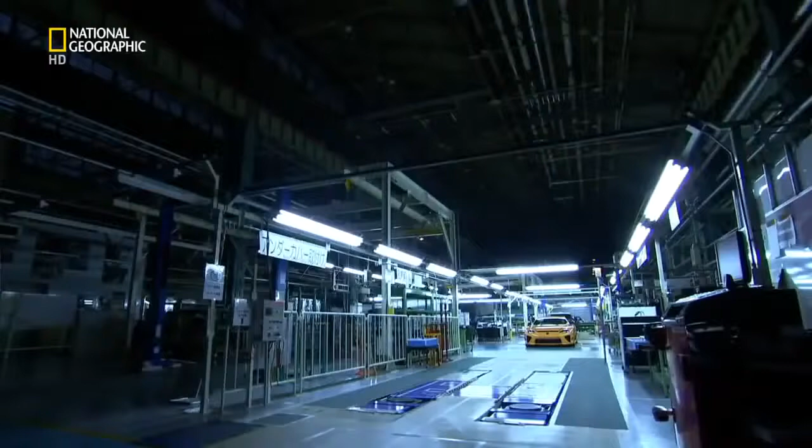Inside this top-secret mega factory, a car like no other is taking shape. Craftsmen hand-build what they consider an automotive work of art. Money is no object. This machine must redefine a billion-dollar brand. Failure, not an option.

Japanese marque Lexus sells itself on luxury, marketing its cars as elegant, quiet, high-tech, and efficient. Now, a different kind of car wears the Lexus badge, the LFA. Aggressive, loud, agile. Highest revving V10 engine in a production car. 325 kilometers per hour. A car like nothing Lexus has ever produced before.

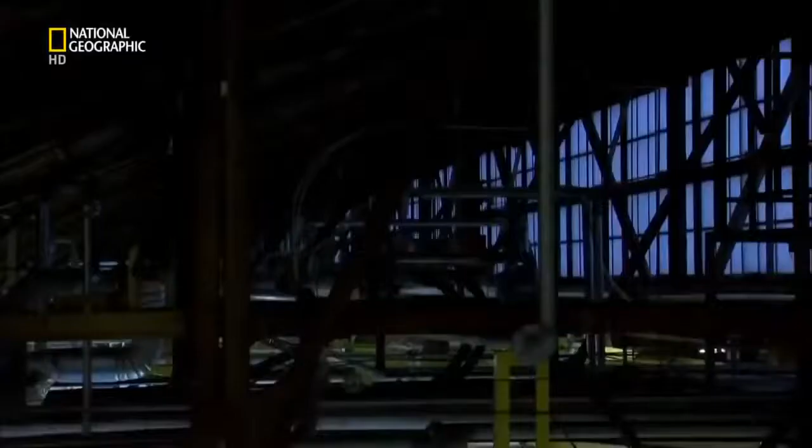I wanted to make a new sports car, one that could stand against the long-established European so-called supercars, Porsche, Ferrari, and Lamborghini, to show that we Japanese could make something like that. It's a risk. The company hasn't made anything like this before. Their reputation depends on its success.

Chief Engineer Tanahashi is stepping into the unknown. He must build a car, a team, and a factory from scratch. Basically, we proceeded at my discretion. And where there weren't any rails, I laid them down.

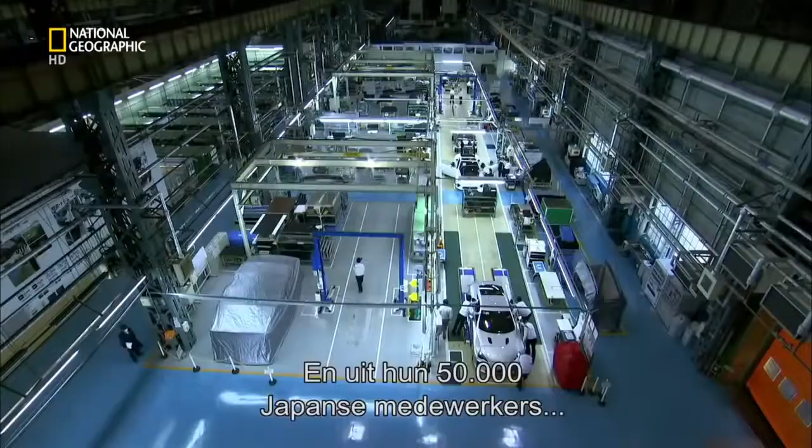Finding a factory in Japan isn't hard when you're part of the country's largest company. Toyota is so big, they even have their own city, Toyota City. Of the company's 15 Japanese factories, 10 are found in the city or close by. Among them, the Motomachi assembly plant. The company transformed two unassuming blocks of this megafactory to create the LFA. They then scoured Toyota's 50,000 Japanese workforce to handpick just 175.

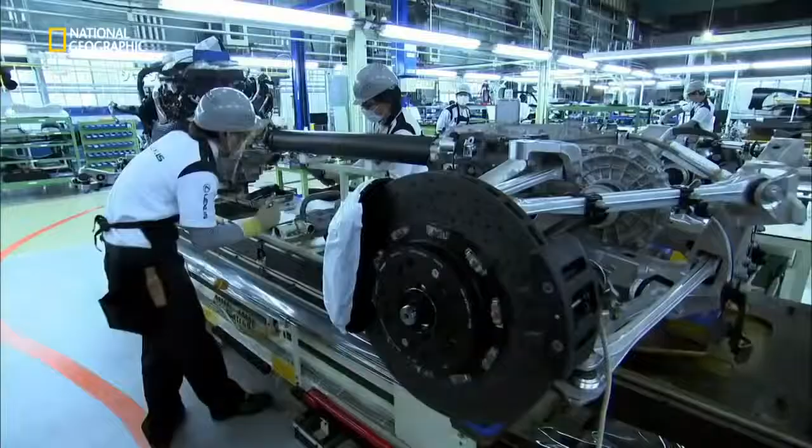All the associates here at the LFA Works feel they are artisans, not just operators. These artisans are known as Takumi, Japanese for craftsmen, a status only conferred on the most highly trained, skilled workers. Each and every associate at the LFA Works is seeking to achieve perfection, taking this challenge on with a sort of samurai spirit.

Yamanaka Shigeru is manager of the LFA Works. His teamwork credentials come from another time-honored Japanese tradition: baseball. Before this, I was working as manager of the Toyota Motor Corporation baseball team, which brought people together from lots of different... It was because I could manage that organization that I was made manager here.

To reach their goal, the tight-knit team utilize sophisticated tools and materials to build the car. The most important of these is carbon fiber composite. Carbon is crucial to the car's performance. It's a material 5 times the strength of steel, yet a quarter the weight. It's the construction material of choice for both Formula One racing cars and the aerospace industry. The company even make their own carbon fiber here on site. Up until now, no television cameras have ever been allowed inside this top-secret facility.

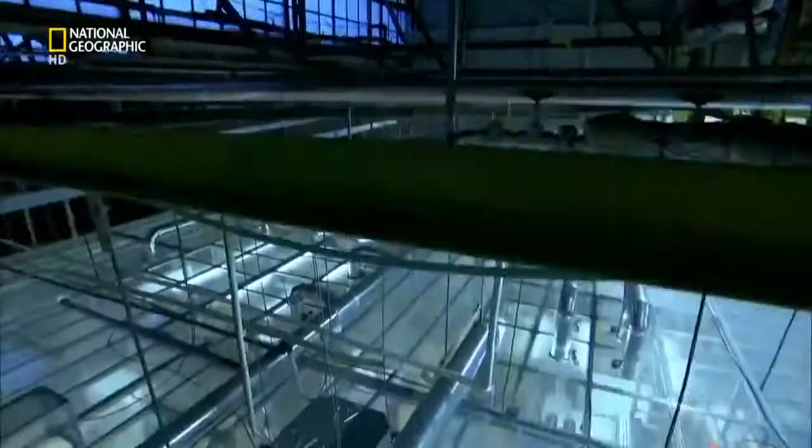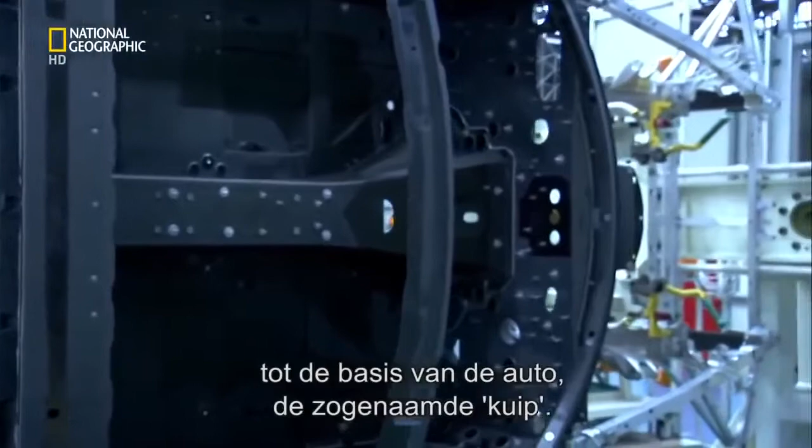First, simple strands of carbon fiber are woven into a pliable cloth using an automated weaving machine. This fabric is then transformed through heat, pressure, polycarbonate resin, and labor-intensive techniques into the car's core known as the tub. The tub is pieced together like a 3D jigsaw.

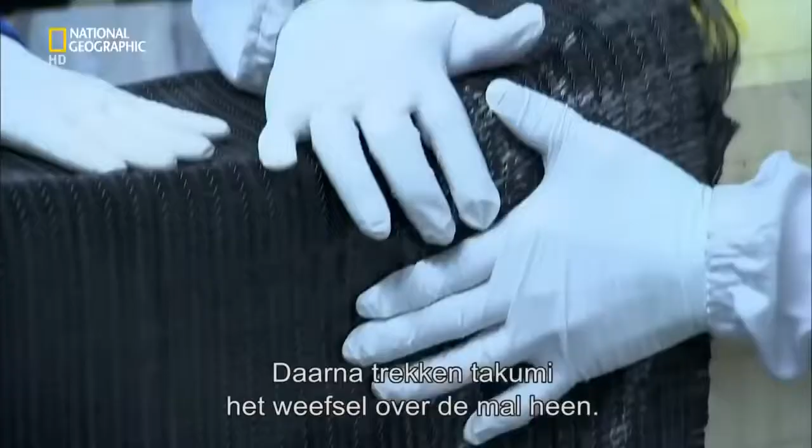It starts with the construction of the floor. To make it, precisely cut carbon fiber cloth is lifted onto a mold. Next, skilled Takumi smooth the supple fabric over the mold. This one is for the transmission tunnel that will house the drive shaft and exhaust.

In very complex areas like this, the fabric inevitably becomes frayed and not very neat. The associates work with these areas as if working with silk, taking great care every day. They also wear masks to avoid breathing in the hazardous fibers. In the beginning, the associates found it very difficult to work this material. It was much easier when they used an iron.

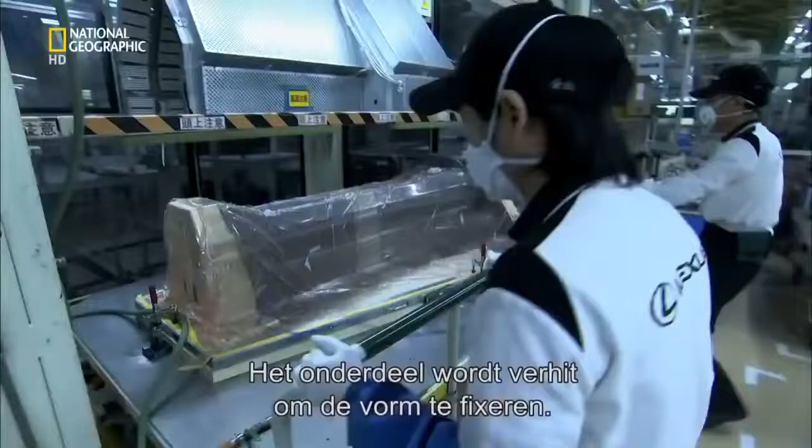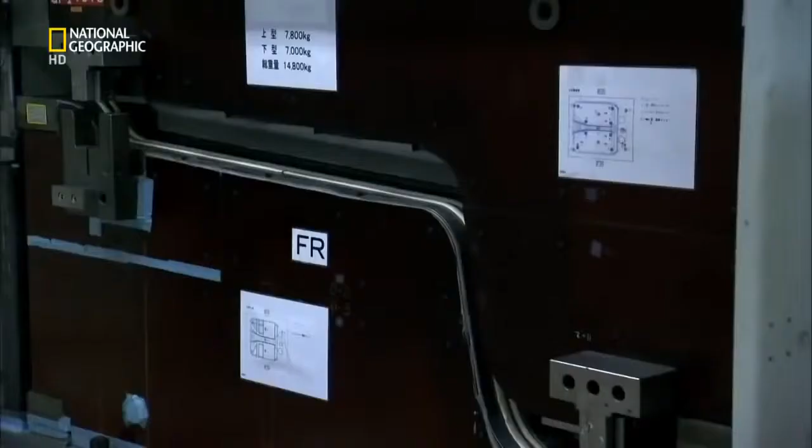The completed part is heated to set its shape. It's then fitted into a template, along with 7 other floor parts, and inserted into a 1,000-ton press. A glue-like resin is pumped into the template, and the whole section is then baked for 8 hours at 130 degrees Celsius. Under this pressure and heat, the resin sets hard, binding the individual parts together to produce the car's floor panel.

Back in 2000, the concept of a world-beating supercar only exists in one man's head. At the company, I talked to just a small group of people at the top, not expecting anything, and they said, go ahead and try. With permission to proceed, Tanahashi gathers a team of engineers around him, and they start to make the basic engineering decisions. In the beginning, we planned to make the body from aluminium.

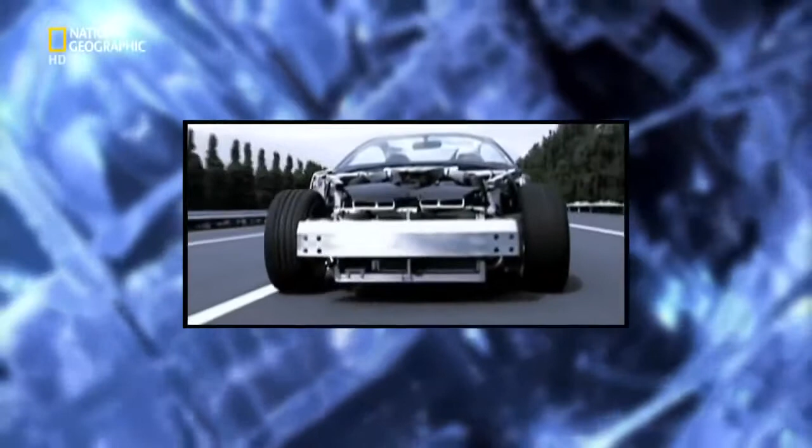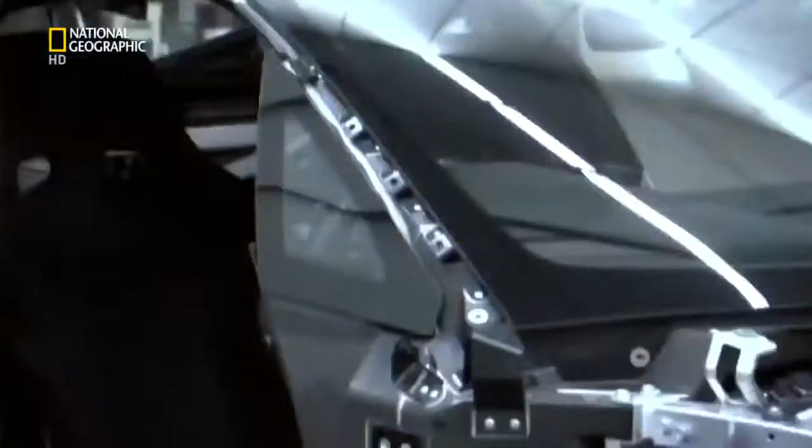But Tanahashi is fascinated with the possibilities offered by carbon. Developing a supercar, a super sports car, carbon fiber was a material I really wanted to try using, if at all possible. But this wonder material has its drawbacks. It's expensive, and the company has never used it to build any of their cars before. Despite these significant challenges, Tanahashi gets his way.

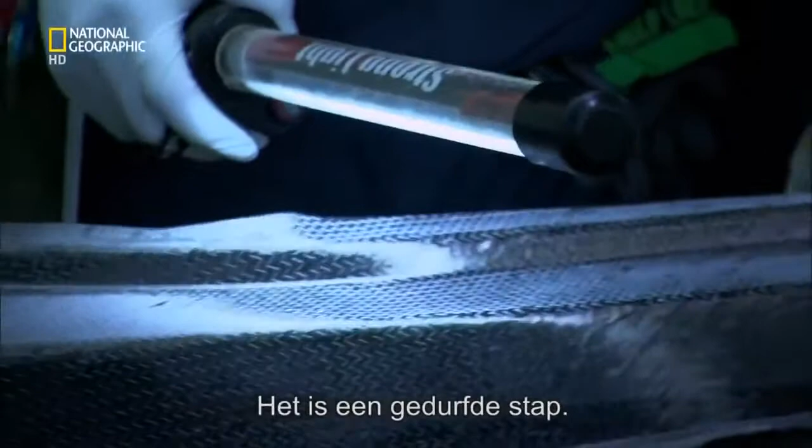In 2005, my boss said, why not go for carbon, slapping me on the shoulder. And I made the decision to go for carbon then. It's a bold step. Everyone involved with this project must master a material they have no experience with at all. It was the first time the workers had touched carbon, and everything about it was difficult for the workers.

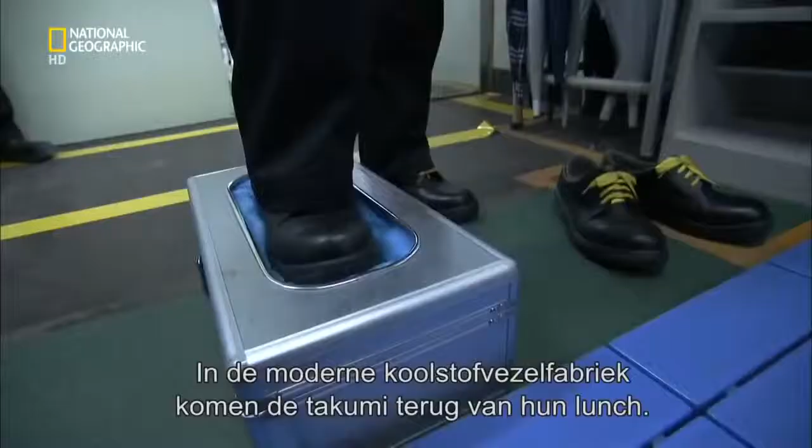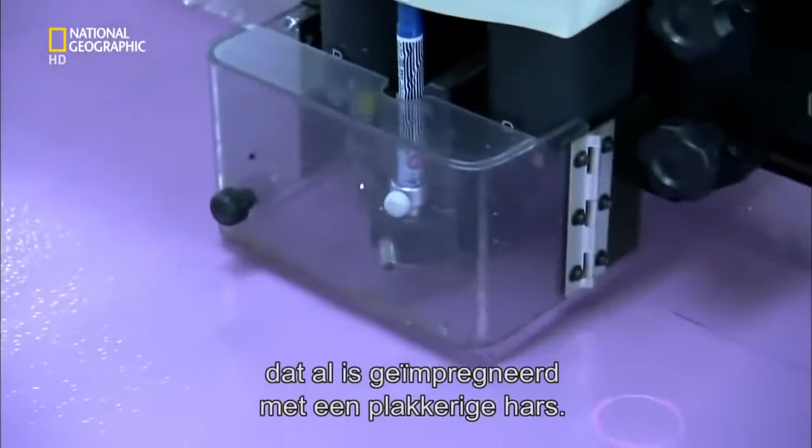In the state-of-the-art carbon fiber facility, the Takumi are returning from lunch. They vacuum themselves down to remove any foreign particles before entering a highly confidential sealed room. Here, the majority of the tub's central frame is created using the most intricate techniques. In this process, an automated laser cuts out hundreds of individual shapes from carbon fiber cloth that's been pre-impregnated with a sticky resin.

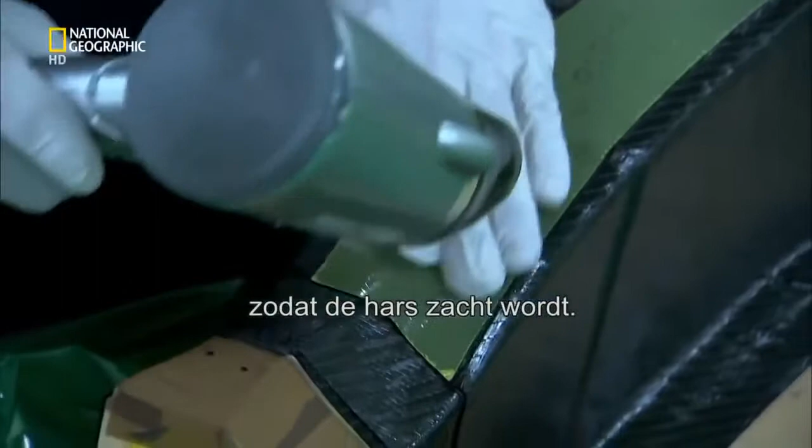Next, Takumi layer the cutouts, up to 20 sheets deep, onto a mold. This one will make the right side panel. The associate uses a dryer to raise the temperature of the laminate and half melts the resin as he applies it. The tacky cutouts stick to each other and any gaps are squeezed out using a vacuum bag that forces them together.

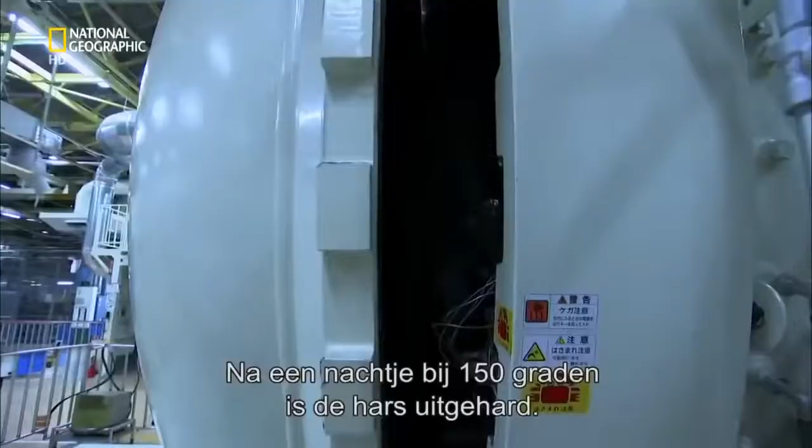The shrink-wrapped side panel is then wheeled across the works and loaded into a pressurized oven. Baking overnight at 150 degrees Celsius sets the resin, resulting in a side panel that's both ultra-strong and ultra-light. An aluminium equivalent would be twice as heavy. Weight saving is the holy grail for all auto engineers. Less weight and more power leads to increased acceleration, and speed defines a supercar.

The body of the LFA is 65% carbon fiber, helping it accelerate from 0 to 100 kilometers per hour in 3.7 seconds. If made of aluminium, it would be 100 kilograms heavier, like having a sumo wrestler in the passenger seat. As it is, this car weighs just 1,400 kilograms all in.

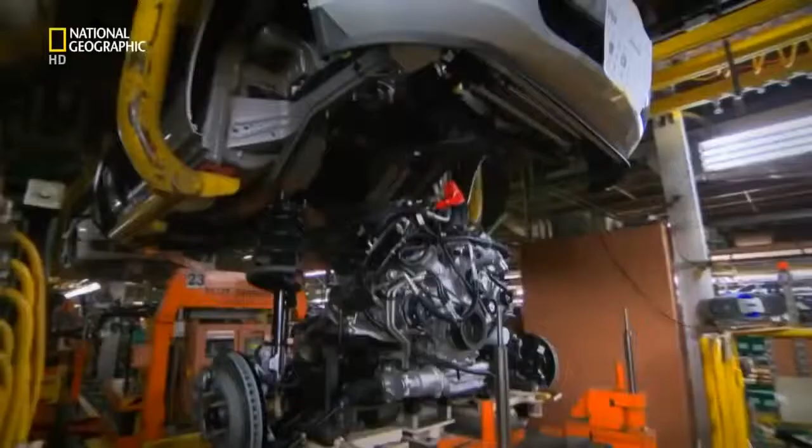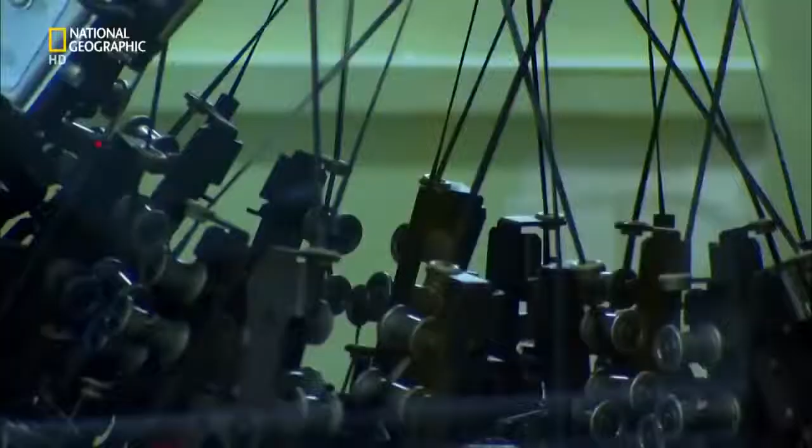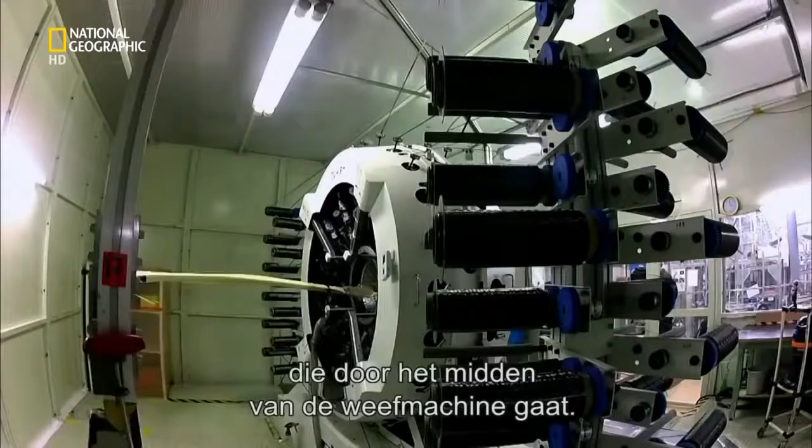Back at the factory, in a locked room, a bespoke machine creates two crucial parts to complete the tub's construction. The roof rails support the windscreen, as well as protecting the driver if the car rolls over. This custom-built circular loom weaves the carbon rail in 3D. It uses lasers to control the feed of carbon fiber strands onto 144 bobbins. These knit the carbon around a top-secret automated template that's fed through the center of the loom. This is done twice over to cross-thatch the carbon weave, so giving the rail its strength.

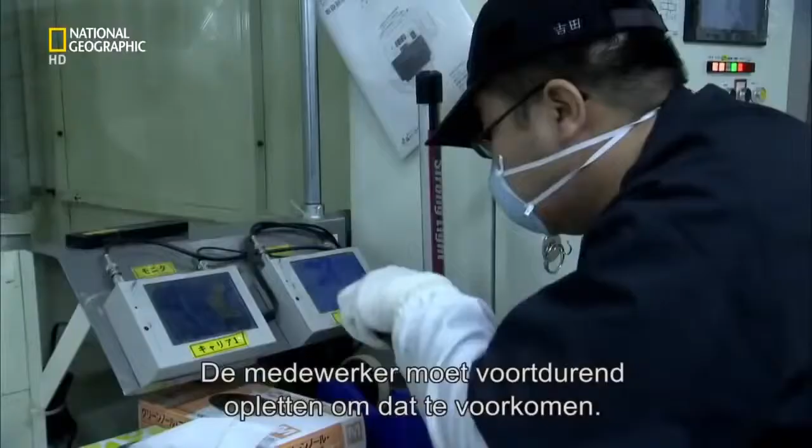The whole mechanism has its own control box, and for good reason. If something goes wrong, even a little thing, the shape gets distorted immediately, so the operator constantly pays attention to avoid this. The roof rail is heated and impregnated with more resin to complete its metamorphosis from a flexible tube to a rock-hard rail. You may think that this is quite heavy, but it is only 2 kilograms.

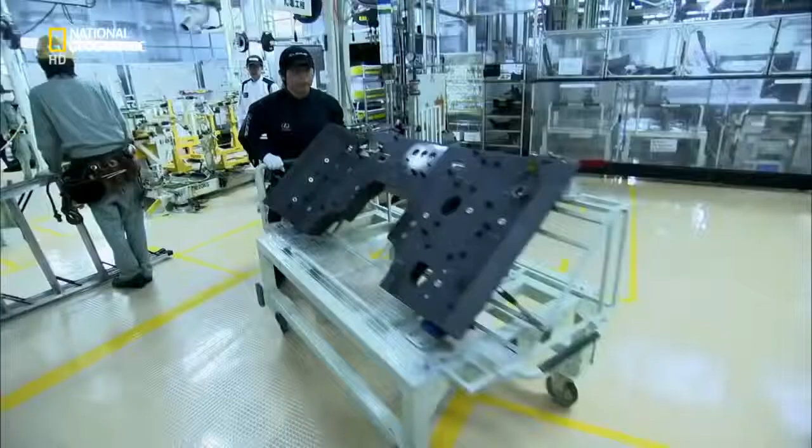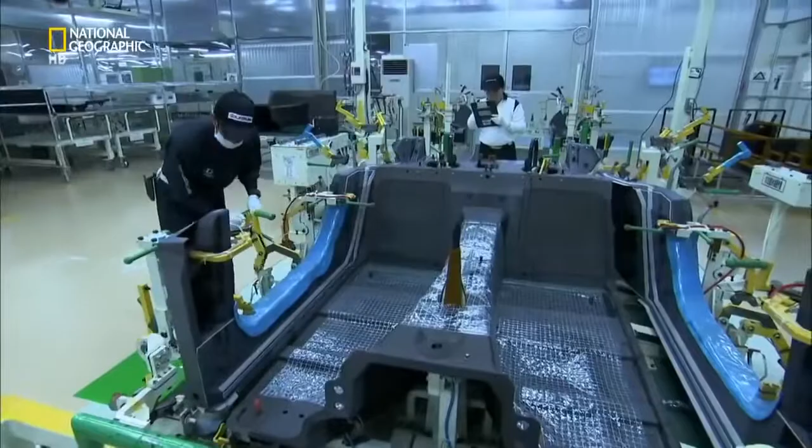The tub is bonded in another top-secret jig. First, a super-strong adhesive, known as epoxy resin, is applied by robot and hand to each of the parts. The separate parts are transferred to the jig and locked in place. Pop rivets keep the pieces aligned. To cure the epoxy, the jig is pushed into an oven and then baked for 60 minutes at 60 degrees Celsius. The resulting tub is so strong, it acts as both the structural core of the car and as a crush-resistant safety cell should the car crash.

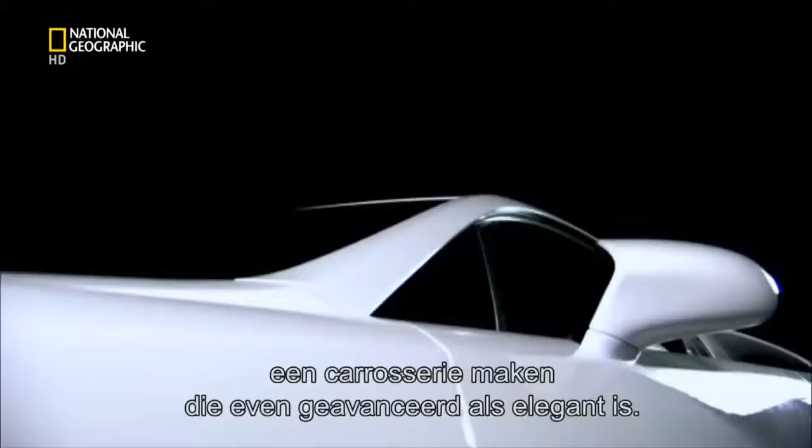The challenge now is for Matsumoto Kengo, chief designer of the LFA, to create a car with a body as technical as it is elegant. For us, aerodynamics, heat and airflow management should be tangible in the design.

A conventional car cools its engine with forward-mounted radiators that suck cold air through a front grille. Not the LFA. Front space is at a premium, so coolant is pumped from the hot engine to twin radiators mounted behind the car's rear wheels. Matsumoto had to shape the car to funnel cold air to these vital components.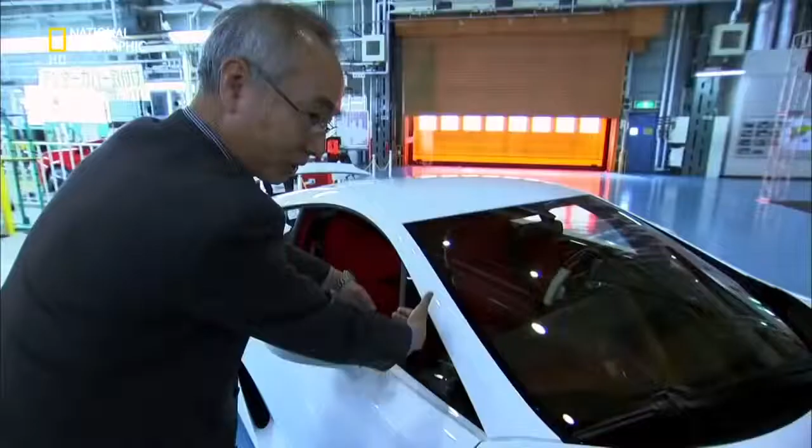Airflow management is optimally controlled by setting the angle between the door mirror and the cabin. It goes past the cabin and smoothly into the air intake for the rear radiator. This shape is not just for styling. The intake is deliberately formed here, from the base of the glass. The result is an airflow system capable of cooling the engine even under the most extreme race conditions.

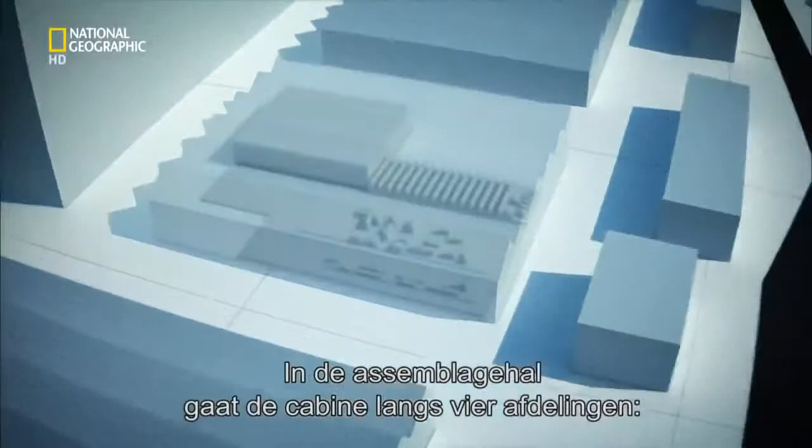It's 8:45 in the morning at the LFA works. The Takumi are warming up for an 8-hour shift ahead. Their first task is to greet the bare cabin as it arrives from its 15-day build in carbon round the corner. In assembly, the cabin will progress through 4 positions: trim, chassis, final, and alignment. 15,000 parts go into making an LFA. The first of these are attached here in trim.

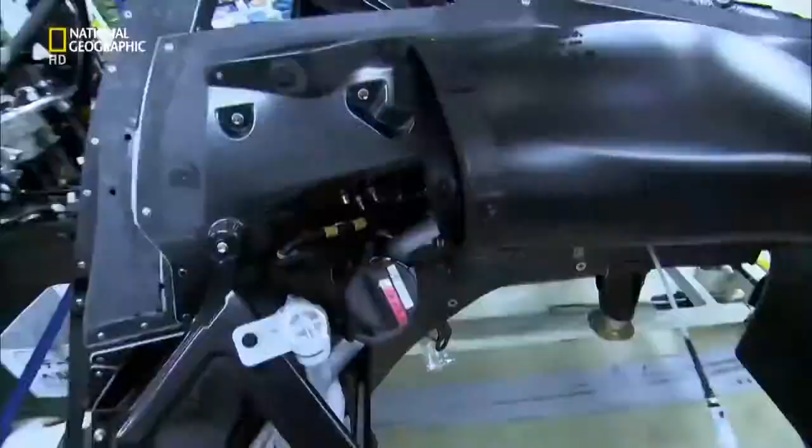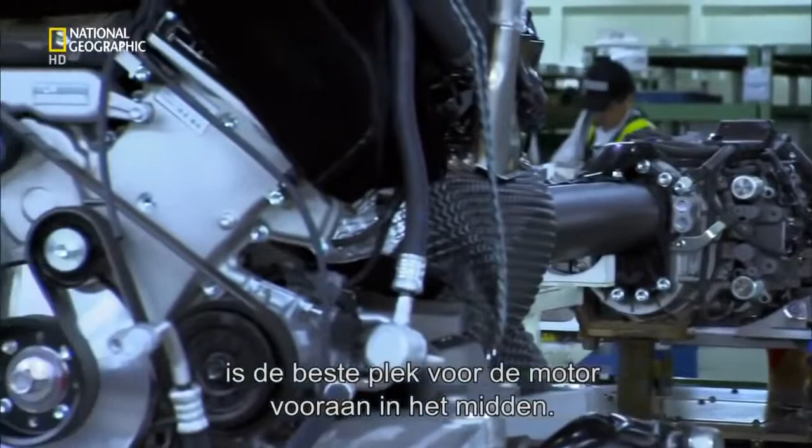Just meters away, other Takumi assemble the drivetrain and suspension. The drivetrain comprises the transmission, torque tube, and last but not least, a 4.8-litre V10. The location of this engine is crucial to the car's entire concept. I wanted to build the car around the people in it. And for a supercar that puts people first, the optimum place for the engine is front mid.

This front mid location puts the engine between the driver and the car's front wheels. With the transmission placed at the rear, the driver is in the center and the car feels balanced to drive. The aim is to make the car's handling as good as possible. But a front mid configuration dramatically restricts the space available for the engine. Tanahashi has a problem.

You need an engine of a certain size with a certain degree of compactness, but you want a high-powered engine as well. Tanahashi needs a small engine to fit in the restricted engine space, but he also needs the power of a large engine because power equals speed. And that isn't all. The high-pitched sound of Formula One makes you shiver, doesn't it? I really wanted to have that as part of the LFA.

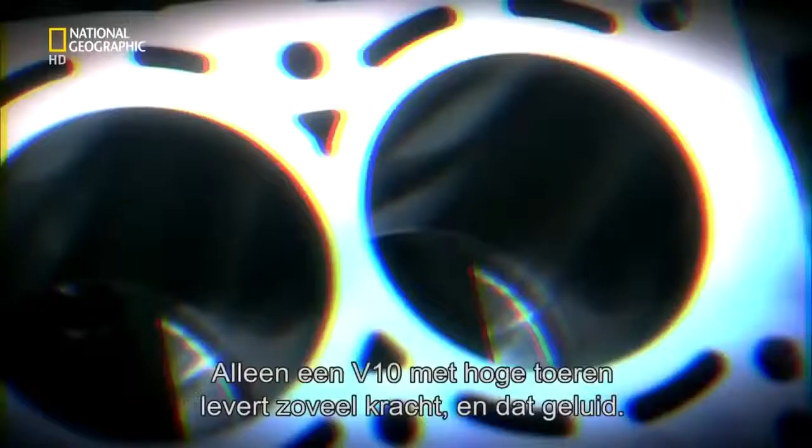Only a high-revving V10 engine supplies this combination of power and sound, but a traditional V10 is too big for his mid-front configuration. Lexus have made nothing like this before. Their production line cars use 6- and 8-cylinder engines engineered for a super quiet ride. This V10 will be the opposite. Tanahashi turns to some old friends for help.

We are a motorcycle manufacturer. We understand power alone is not enough in a vehicle. For a sports car, small and lightweight is critical. For almost half a century, Yamaha have worked with Toyota to create high-powered lightweight engines and cars. The legendary 2000 GT, star of the James Bond film You Only Live Twice, and Japan's first true sports car, was the first fruit of their collaboration.

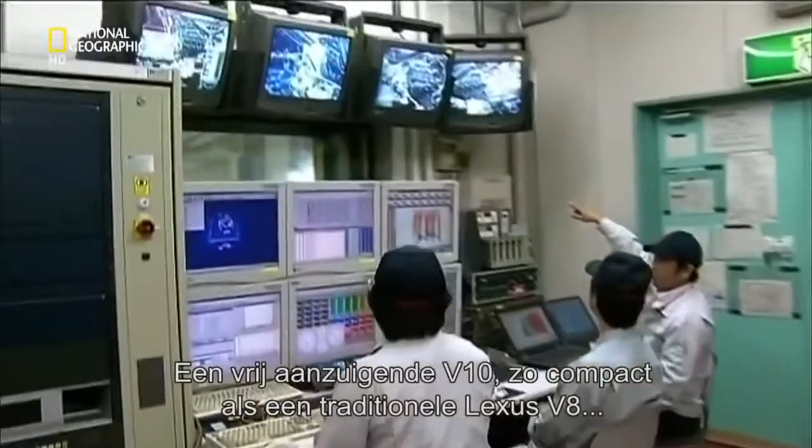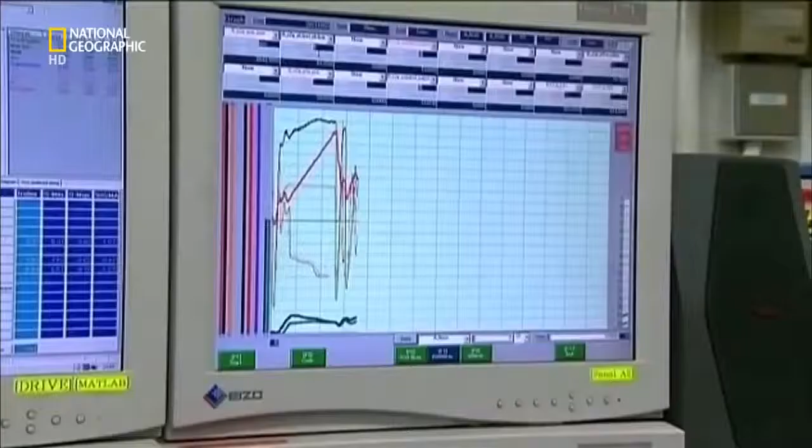Headed by Lexus engine guru Okamoto Takamitsu, the team sets itself an ambitious goal: to create a naturally aspirated V10 engine as compact as a traditional Lexus V8, with the weight of a V6. I wanted to create something different to any other supercar engine. Normally, engineers use turbochargers to boost the output of smaller engines to simulate V10 power. But turbocharged engines don't have the rapid response, acceleration or sound of a naturally aspirated V10.

By using Yamaha's motorcycle know-how, the lightest metals, and redesigning the engine's guts, Okamoto creates a masterpiece of engineering. A non-turbocharged compact V10 that fits into a mid-front design while keeping weight to a minimum.

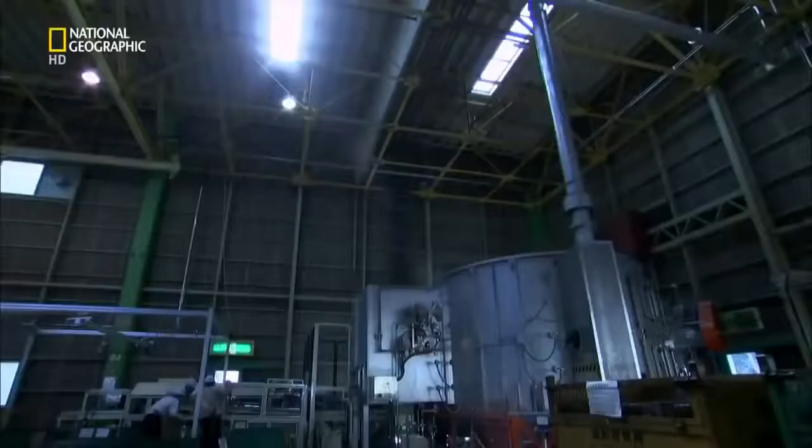The engine starts life in Toyota's Miyoshi plant as molten aluminium. It's cast in a 3D resin-impregnated sand mold made from 37 individual blocks that take a week to fashion. With the blocks fitted together, the mold is ready to be filled. At 750 degrees Celsius, impurities are scooped off the top of the molten aluminium.

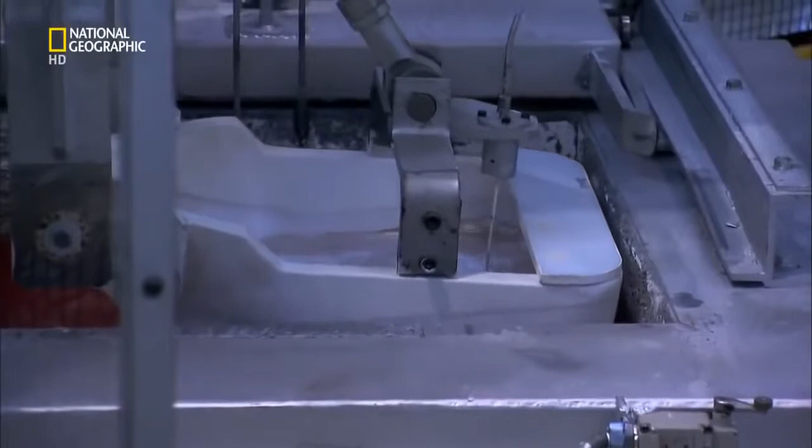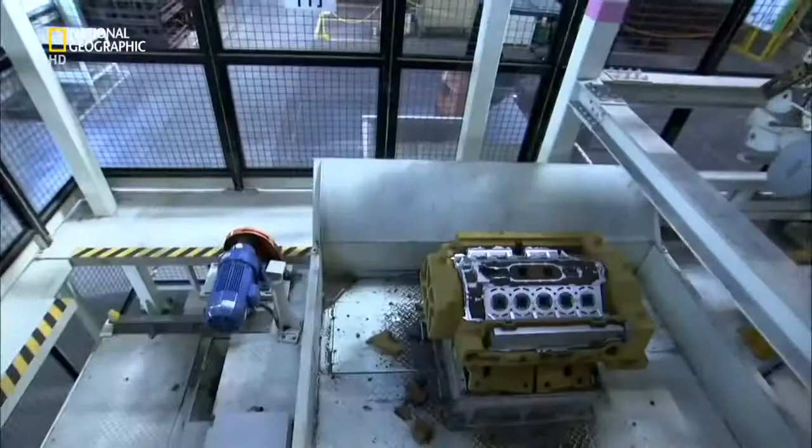The liquid metal flows into the mold as a vacuum sucks out any contaminating gases. Two hours later, with the metal set, the sand is hammered off to reveal the solid aluminium engine block inside.

It's off to Toyota City's Honsha factory and the company's highly confidential Formula One engine facility. These works are always off limits. We're going to go in. Are you ready? Come in. Television cameras have never been allowed in here before.

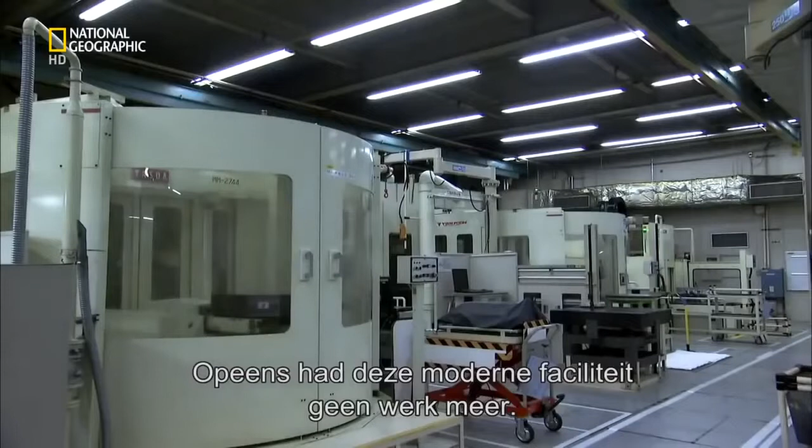For a decade, Toyota spent big competing in Formula One racing. But without a win in 139 races, they withdrew in 2009, leaving this state-of-the-art facility idle. For the LFA team, it was too good an opportunity to miss. The close parallels with F1 engine technology make this milling facility a ready-made fit.

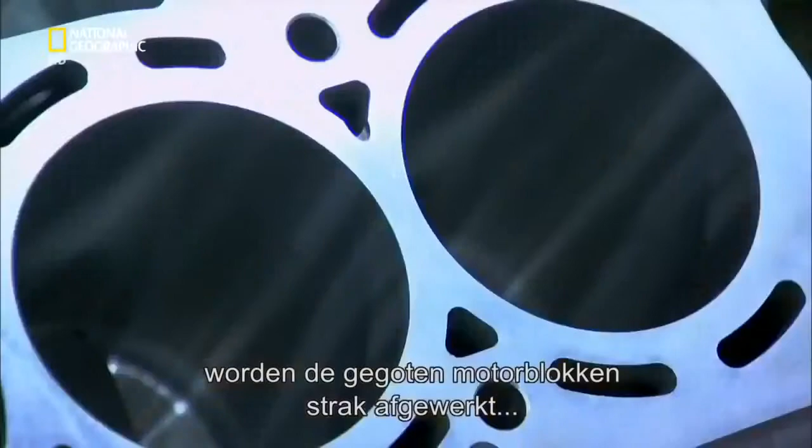In these million-dollar automated machining tools, the rough engine casts are milled, drilled and polished before emerging as precisely spec'd engine blocks. Then the robots hand over to humans. In a sealed room, Takumi hone every sharp edge using precision polishing tools.

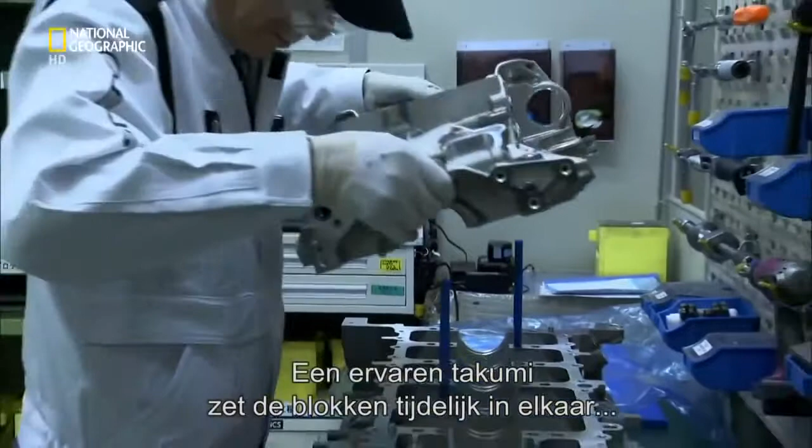Finally, a highly skilled Takumi pre-assembles the finished engine blocks to check they fit precisely. These blocks and screws are paired for life. Disassembled, they travel as a unit to Yamaha's Iwata city plant, 90 kilometers southeast of Toyota City.

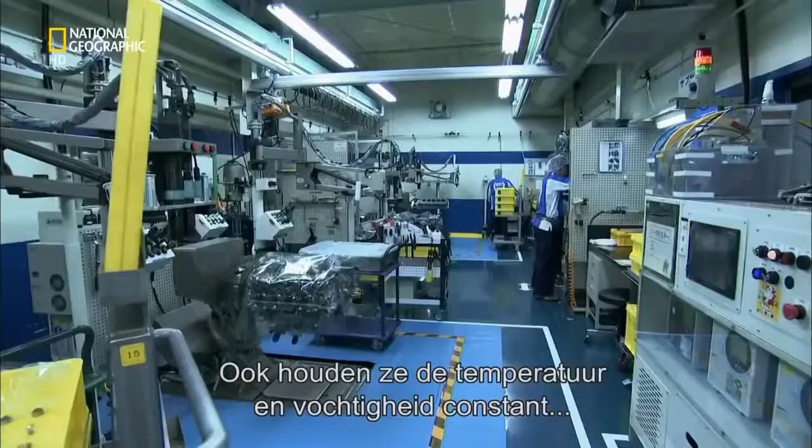The engine room here takes obsession to new heights. As you'd expect, hairnets and airlocks prevent any particle contamination. But the room is also kept at a constant temperature and humidity to ensure that every engine part is at the same state of thermal expansion during assembly. This is more laboratory than workshop.

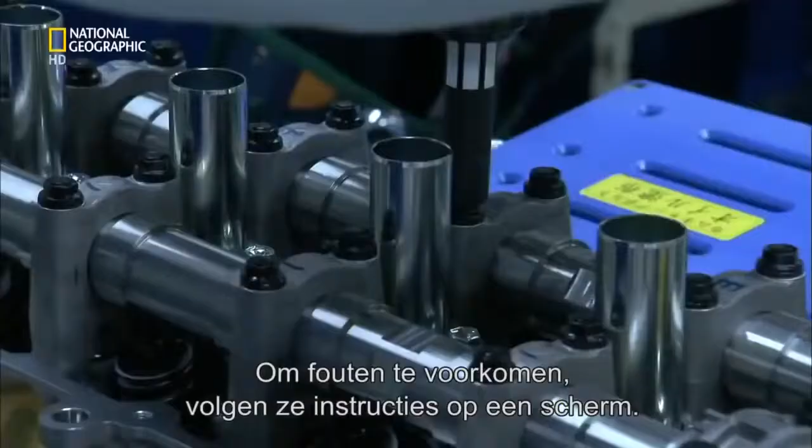The 2,200 engine parts are divided into 61 different kits for assembly by number. 4 highly trained Takumi work here. Each is responsible for a single engine from start to finish. To avoid any mistakes, they follow a series of on-screen instructions. It takes 2.5 days to complete the build of one engine. Each hand-assembled engine bears the Takumi signature.

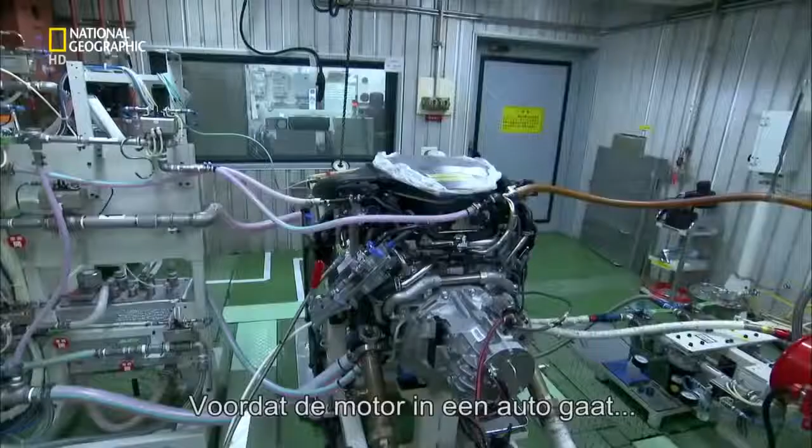Before this masterpiece goes anywhere near a car, it undergoes a half-day of exhaustive testing in the room next door to engine assembly. The resulting 4.8-litre engine is so responsive that it takes just half a second to reach 9,000 RPM. That means instant acceleration, whatever gear you're in. This engine has excellent response and more RPM than any other commercially available engine. Response time is so fast that a digital rev counter is the only unit able to keep up.

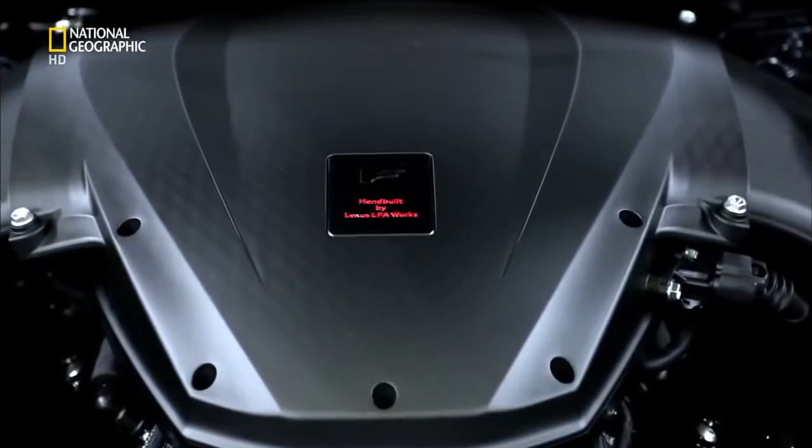And the sound of this high-revving engine is unmistakable. The sound of the LFA is unique, and once heard, never forgotten. To achieve the engine soundtrack that Tanahashi insists upon requires more of Yamaha's specialist knowledge. We are a manufacturer of musical instruments, so when it comes to sound technology, we have a certain level of know-how. Honji Yoshikazu is obsessed with sound.

I think the relationship between a super sports car and its driver is like the relationship between a top musical performer and their instrument. When they play in a certain way, they can listen to that sound and use it to produce another, better sound. Critically, a car has 2 different sound characteristics. One sound is the exhaust. You can call it an iconic sound. Just by hearing that sound, you know which car it is. The other, which we were particularly concerned with, is the sound heard by the driver.

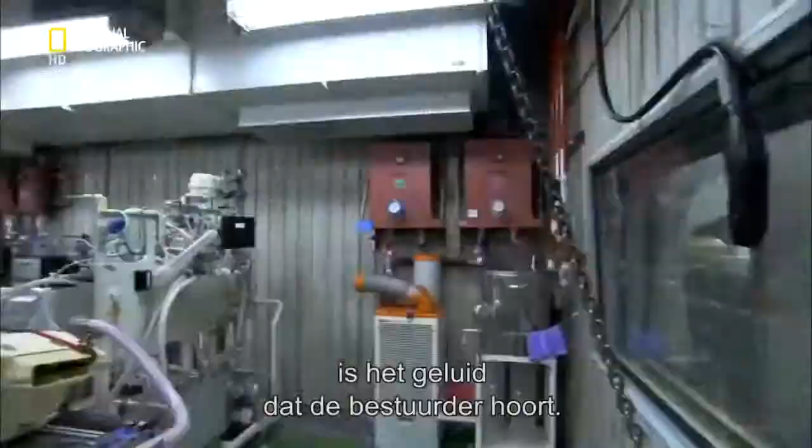To refine the driver's soundtrack, Heiji Maruyama, general manager of Yamaha Motors, had to redesign the component that sits on top of the engine, called the surge tank, by turning convention on its head. The function of the surge tank is to send air equally into all 10 cylinders. Normally, techniques to reduce noise from the intakes are used. We thought to go the other way and use it to amplify the sound, to communicate it to the driver.

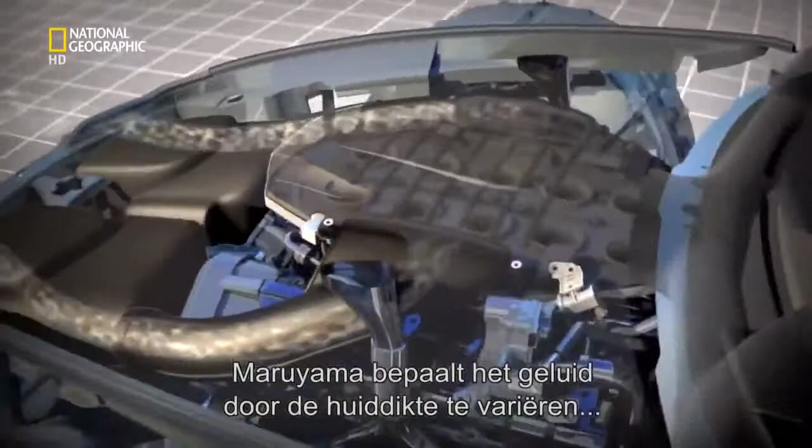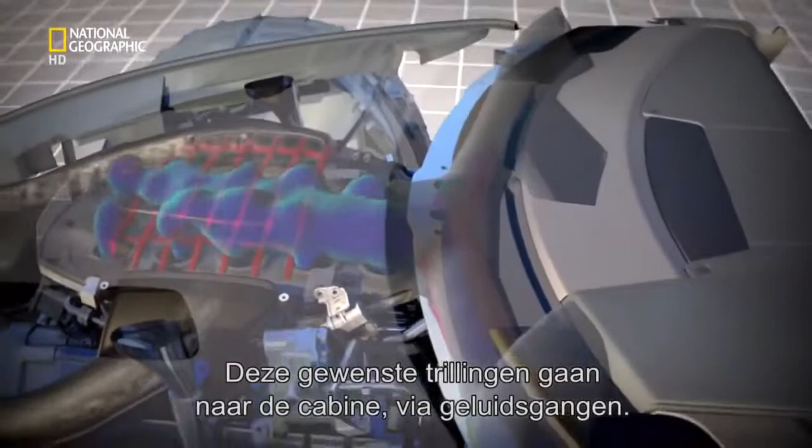Maruyama tunes the chamber by varying the thickness of the surge tank's upper surface and adding internal vibrating ribs. The construction is very like that of an acoustic guitar or violin. The team channeled these good vibrations back into the cabin using sound passages. We use these to send low-pitch sound to the driver's feet and higher frequency sounds through at ear level. The driver is in the middle of this dynamic surround sound system.

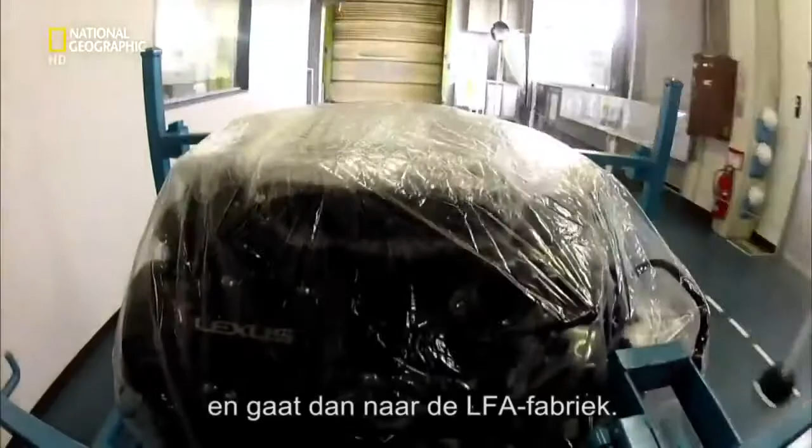The completed engine is forklifted onto a waiting truck for shipment back to the LFA works. Here, as part of the assembled drivetrain, it's inserted into the cabin's belly, guided only by eye.

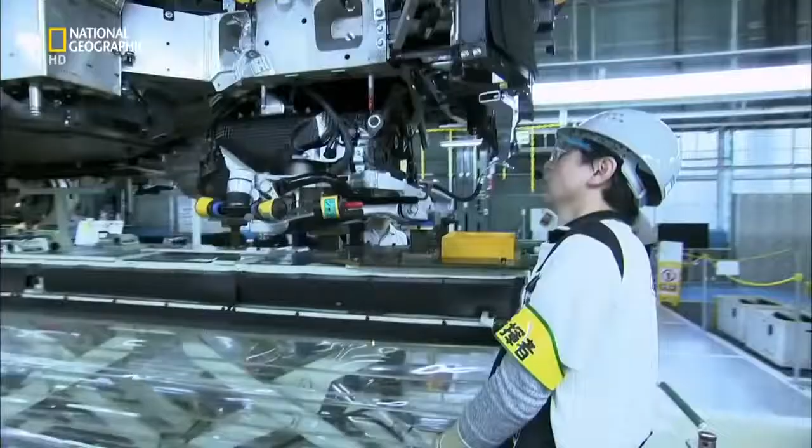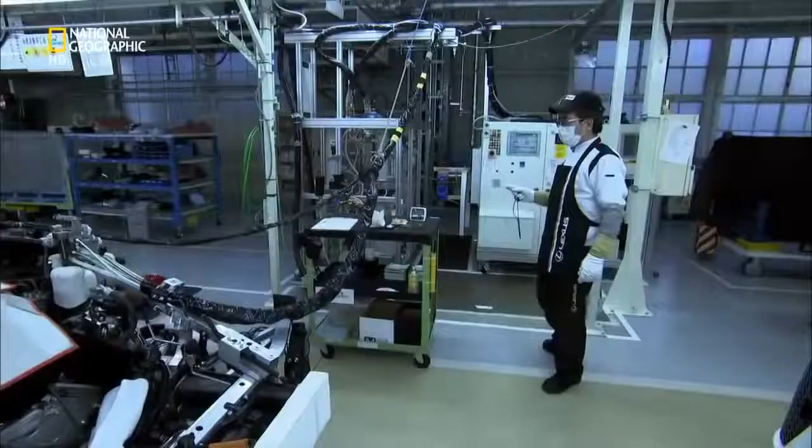With the guts of the car in place, it's time to feed them. An automated pump injects engine oil, brake fluid and coolant into the appropriate underbonnet opening. In Japan, machines play a tune to alert anybody nearby that they're running. This one plays an American folk song. With the precise volume of fluid added, the pump stops, as does the music.

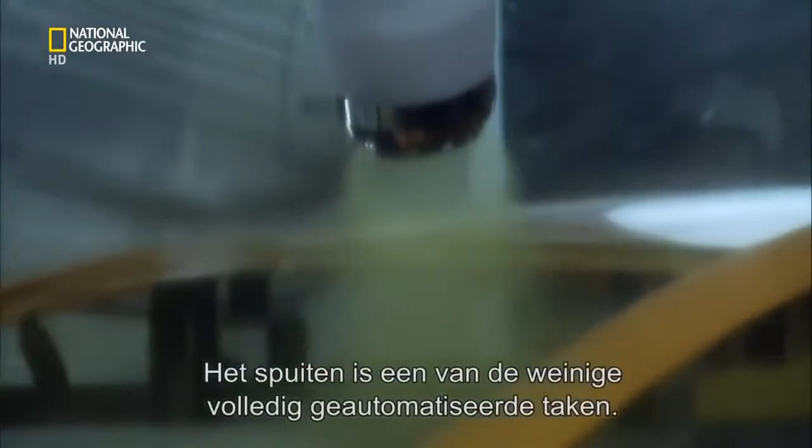The car's 9 moulded glass fibre body panels are manufactured off-site. This material is both strong and light, but far cheaper to replace than carbon fibre, should the car crash. The paint shop is under the same roof as assembly, but it's a very different world in here. At the LFA works, paint is one of the few production processes performed by robot. The company believes they give a more consistent finish.

But there's always an ongoing human battle in the paint department. Dust is the greatest enemy for painting. If dust gets into the paint surface, when it's heated, the dust swells up and causes a blister. So the atmosphere is controlled on a daily basis, and there's a strict dress code. Up to 5 layers of paint are applied. And where robots can't reach, humans can.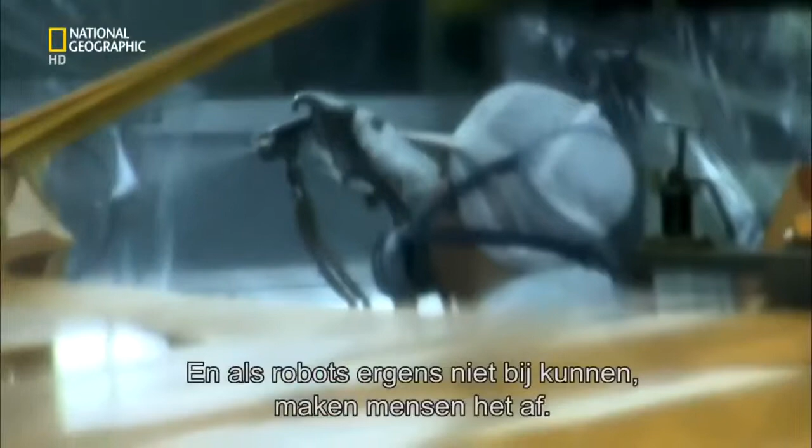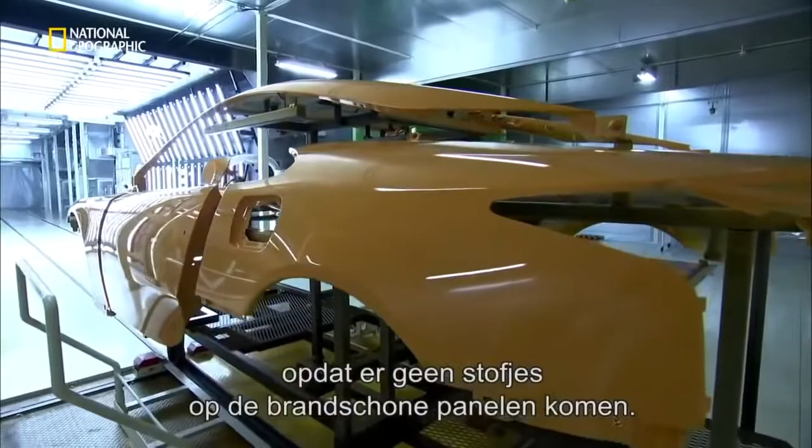Job done. The sprayed panels are dried in an oven at 100 degrees Celsius for 50 minutes before being wheeled out for inspection. The battle against dust continues, with water nozzles spraying a fine mist into the air to stop anything drifting onto the pristine surfaces. A bright light inspector spots any blemishes and marks them up to be polished out.

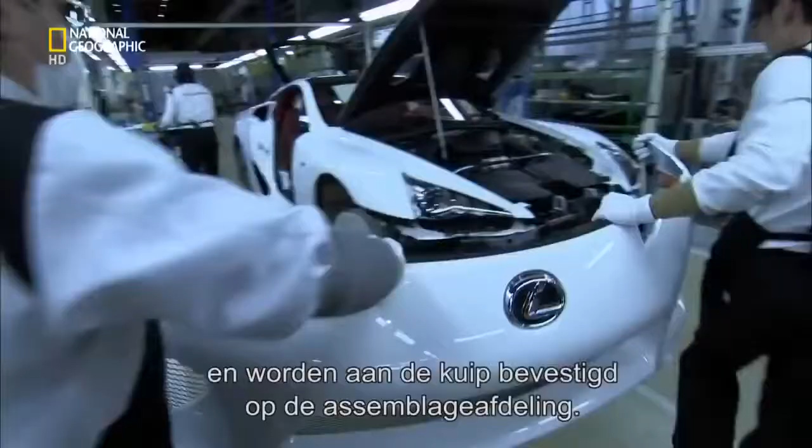The completed panels are wheeled out of paint across the factory floor and attached to the carbon tub back in assembly at the 3rd position on the line, known as final. Here, the hand-stitched leather interior is installed, and the forged aluminium wheels with bespoke Bridgestone tyres are also fitted. It looks as if the associates are performing each task very slowly, but every one of them is working very carefully and with a high degree of certainty. If you compare it to a sport, they are top players who complete a successful play every time.

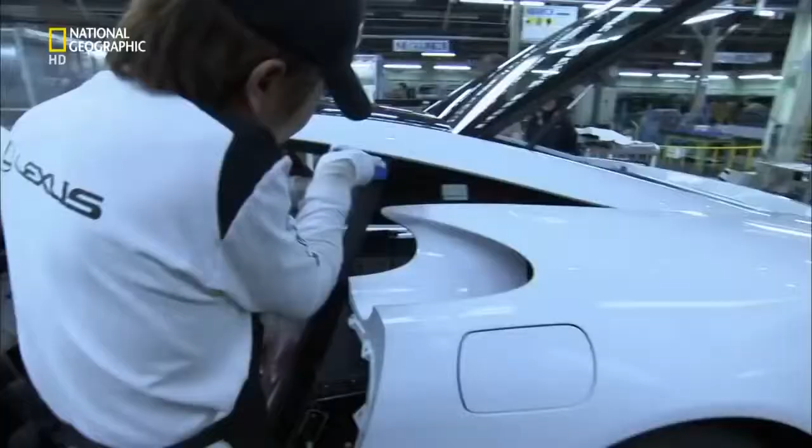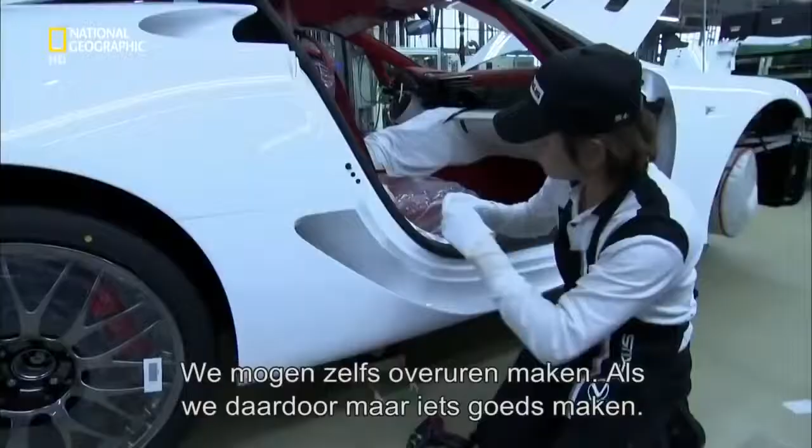The LFA works runs like clockwork, yet there's no clock watching. The reason why there is so much time is that Chief Yamanaka tells us to take our time and work slowly so that we can make something that we know is good. How can I put it? He says that in order to ensure quality, we can take as much time as we need. That goes for overtime as well. If it means we make something good, then we can do overtime.

The only stipulation is that one car must drive off this assembly line every day. And from the beginning, Chief Engineer Tanahashi was clear that only 500 would be built. At a car a day, that will take just 2 years. And then, this factory will close. Making only 500 cars positions the LFA as a very special car. There is no plan to make any more at all.

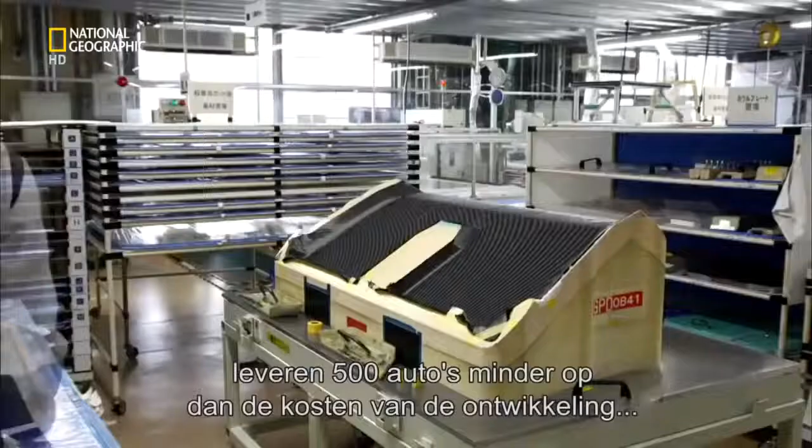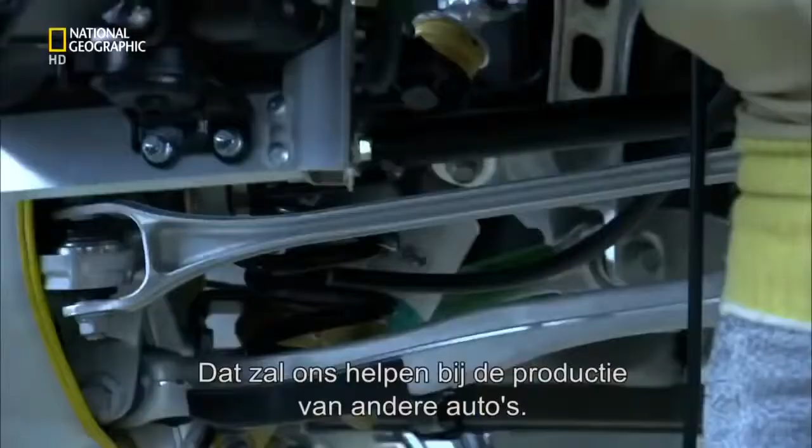Even pricing the LFA at $375,000, the most expensive Japanese road car ever, a limited production run isn't going to recoup the costs of development, the use of cutting-edge materials, and unlimited overtime. I think it will be difficult to make a profit with only 500 units delivered. But by producing the LFA, the Lexus brand gains in value and is well received worldwide. I think the legacy will be left in technique, knowledge and teamwork for making cars that will please our customers in the future.

Back in 2004, with the prototype build, Chief Engineer Tanahashi takes a bold decision. He wants the car proved on the severest of tracks. Nothing in Japan fits the bill. So he takes the entire development team to the notorious Nürburgring in Germany. For us car makers, the Nordschleife on the Nürburgring is like a mecca for cars. This is where this car was honed. The 20-kilometer Nordschleife section of the Nürburgring is infamous as the world's most punishing test track.

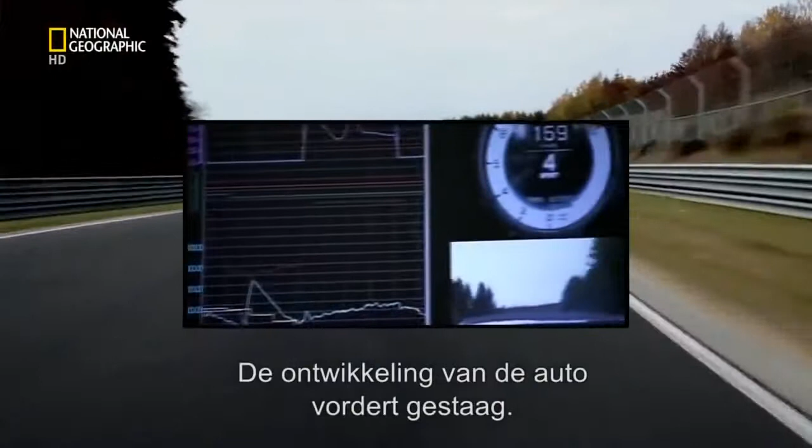For 4 years, the team tests every aspect of the car's engineering around the Nordschleife's dips, jumps, relentless corners, and flat-out straights. The car's development makes progress towards its production deadline, but Tanahashi wants to fast-track its fine-tuning. In 2008, he throws it into the unforgiving world of racing and enters the Nürburgring 24-hour race. It was purely to get more feedback on the production type LFA and to improve it under real race conditions.

The brutal experiment works. A year later, the revised car wins its class. Tanahashi is finally happy, and in 2010, the LFA goes into full production. And when in 2011, a special race edition of the standard LFA is launched, its name pays homage to the racetrack that forged it. It is with thanks to that sacred place that we called it the Nürburgring package.

This Nürburgring package has a retuned engine which pumps out 571 horsepower, 11 more than the standard engine. This extra power requires more downforce to keep the car on the track, so the rear spoiler is larger and fixed. And left and right canard fins on the car's front bumper also increase downforce. The stiffer lower suspension makes it more suitable for a life on the track.

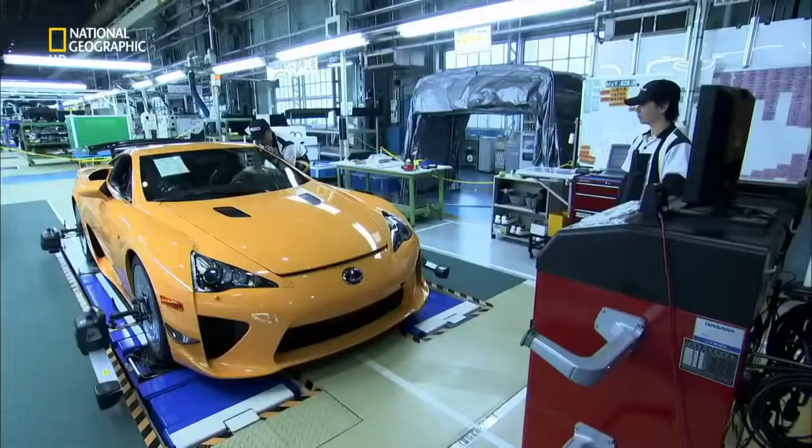Finally, to increase acceleration, the computerized transmission is upgraded to change a split-second faster. It all adds up to a Japanese supercar. Only 50 will be built, each with a price tag $70,000 more than a standard LFA. Back at the LFA works, in assembly's last position, the wheels are aligned to ensure the car handles perfectly. After 3 days in assembly, the car officially moves to inspection.

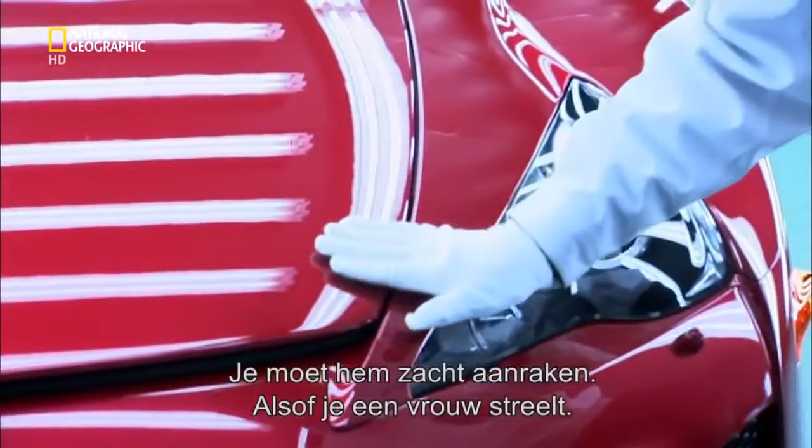The inspection process involves 7,000 separate checks. Hayashi Katsumi does the first of 1,482 of these under lights. Right now, I'm inspecting the paint surface. I'm using my hands to feel for any uneven areas in the bodywork. You have to touch it gently, like I'd touch a woman. I've been doing this job for 30 years. If I didn't have my wife, then it would certainly be my lover.

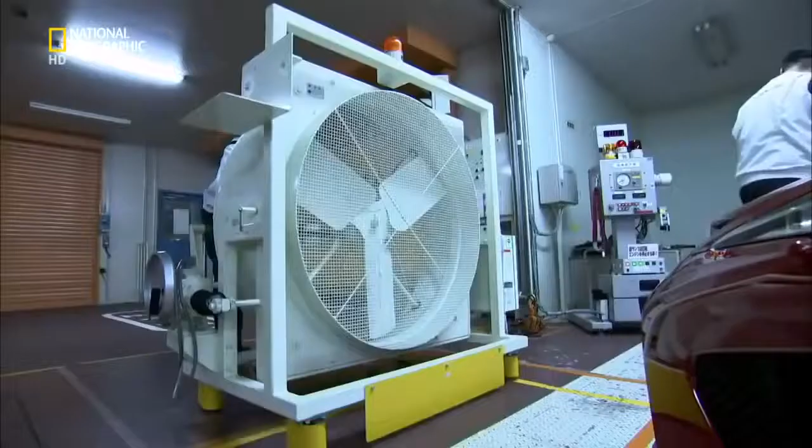With the internal and external surface inspection signed off, the car leaves the LFA works for good. It's driven through the Motomachi plant into quality control. This will be its home for the next 7 days. The checks performed here range from speedometer and brake tests to water tightness. The reports fill a 350-page booklet.

Finally, test driver Amano Nobuaki ensures each of these cars is road ready when it leaves the factory. The car is bedded in on Motomachi's very own test track. The masked sections of the bodywork are to protect vulnerable areas from stone chips. I think this is the best possible job in the world. Amano checks the car's controllability, engine sound, power, braking performance, and vibration noise on the 1 kilometer track.

There is one danger driving this car every day. Every now and again, I just want to forget the job and drive this car away somewhere to have for myself. This car is complete and ready for its owner. To date, all 500 LFAs are spoken for. No more will be sold. The Lexus brand is safe, but Tanahashi still has something more to prove.

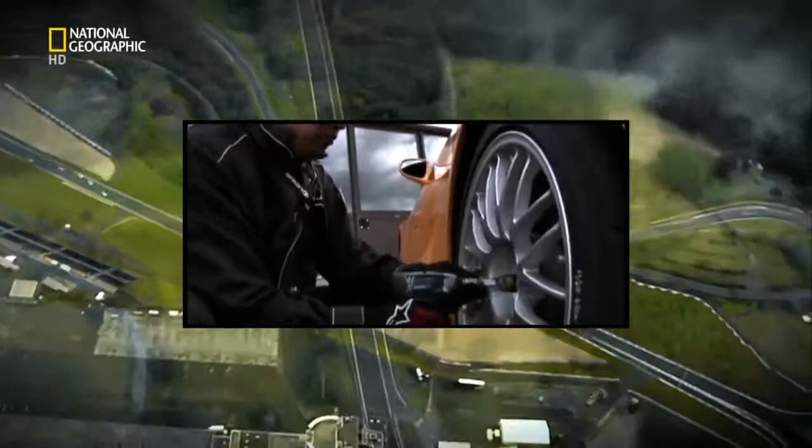In 2011, the team reassemble at the Nürburgring to put the car into the record books. They're out to beat the fastest official time by a road-registered production vehicle. This is the chance for the Nürburgring package to prove its pedigree. With test driver Iida Akira behind the wheel, the team held their breath. I pushed the car on every corner. There are over 150 corners, driving very aggressively, but at the same time, I enjoyed it. To beat the record, Iida must average 167 kilometers per hour over the track's 20 kilometers.

I had no concept of the time when I crossed the finish line. Seven minutes, 14 seconds. The fastest official time by a production car not using slick race tires. And the 5th fastest time ever. It was an unbelievable moment. It's one of the best moments of my life. There are a lot of sports cars, but this one gives the driver a really direct experience of driving. This is a very emotive car, a driver's car.